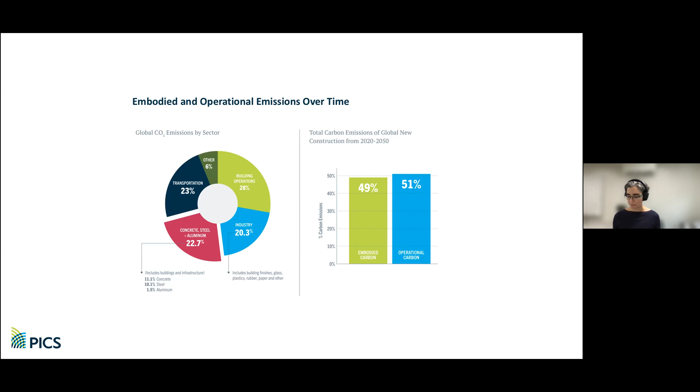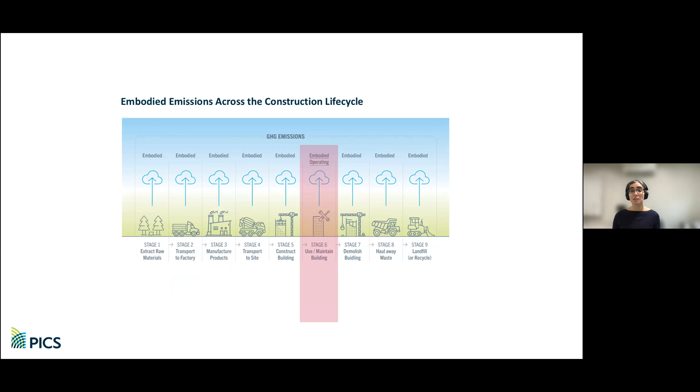To clarify the distinction between operational and embodied emissions, operational emissions only occur during building use, but embodied emissions occur across the entire construction life cycle. This is everything from material extraction to transportation, manufacturing, construction, and ultimately demolition and disposal.

A lot of committed practitioners and policymakers have recognized this issue and have been working hard on it. Influential organizations with a global reach have been developing policy frameworks to tackle it at scale. For example, the World Green Building Council shows that building nothing has the greatest carbon reduction potential. Similarly, the Carbon Neutral Cities Alliance offers an embodied carbon reduction pyramid.

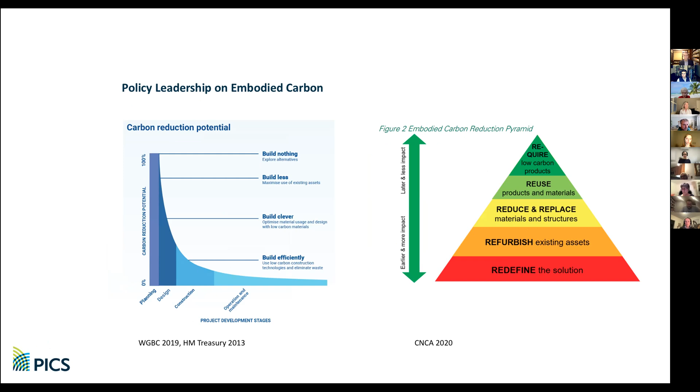At the base of the pyramid, the strategy that would have the most impact is redefining the solution. By this, they mean finding alternative ways to fill needs for space and construction, such as fully occupying existing buildings or building green rather than gray infrastructure.

Building on this, I developed a framework that emphasizes just how much work and the type of work that would have to be done to reduce embodied emissions. We have to acknowledge that reusing materials and reusing buildings would require a transformational shift. That is a shift at a social and cultural level. There is no simple technical fix.

In this framework, I categorize embodied carbon strategies in two major buckets: circular economy and material performance. Material performance includes the strategies that are most widely associated with embodied carbon reductions. This is using lower carbon materials and finding material efficiencies. Circular economy strategies, however, are more holistic. These include material reuse and building reuse.

In BC and elsewhere, material reuse is already gaining momentum with building deconstruction, material salvage, and reuse hubs. Building reuse may seem like the simplest on its surface, but is actually the toughest in practice, because ultimately this would mean fulfilling demand for new buildings with existing buildings instead.

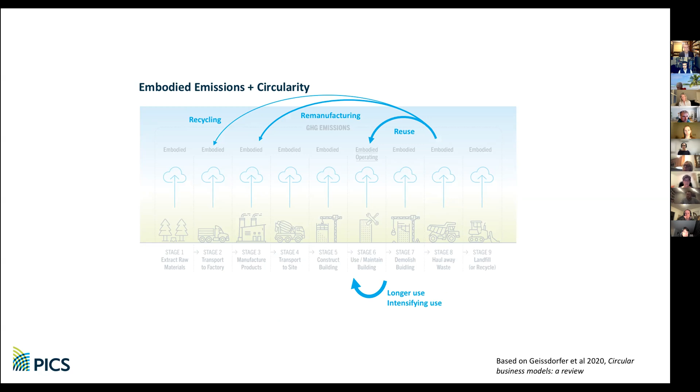So to briefly clarify the connection between embodied carbon and the circular economy, I've mapped circular economy principles onto the building life cycle stages. The circular economy means transforming from a linear take, make, waste model to a circular model that designs out waste through material reuse. Emphasizing highest and best use, you'd begin with increasing the use of buildings, then reusing materials, then remanufacturing, and finally recycling, which in practice is most typically downcycling or to an energy and a material input.

Through research and engagement with a wide range of built environment stakeholders, I found substantial overlap between these material performance and circular economy strategies and well-established work on urban sustainability in the domains of waste, equity, and preservation. In essence, this is a response that is all about reuse, not just reusing buildings, but using existing knowledge and policy pathways that have been around in some cases for decades. The circular economy is at the center because those strategies are poised to have the biggest impact.

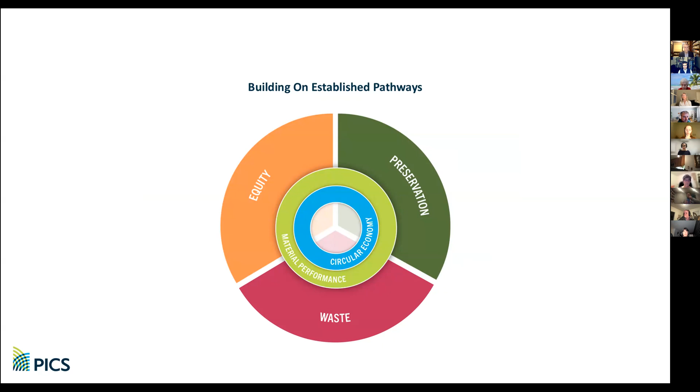In a minute, I'll go into some detail about the opportunities in these three areas. But first, I want to suggest the advantages of this approach. For one, getting traction on the issue, and two, reducing emissions. So to advance the agenda, there are a number of advantages of integrating embodied carbon into core urban sustainability work.

First, for many practitioners and policymakers, embodied carbon may appear to be a new frontier that requires a whole new technical apparatus. This can be daunting and may cause some to disengage for sheer lack of capacity. Making strong links to a larger urban agenda creates the opportunity to build a much larger constituency of support. You don't have to be a champion for embodied carbon per se, but may recognize it as a co-benefit, an additional advantage that merits doubling down on the work you're already doing.

Now, some people get really excited about embodied carbon, but they tend to be a small minority of engineers, designers, and builders. However, there are well-established interest groups that are dedicated to issues of waste, equity, and preservation. So this approach can make embodied carbon a mainstream concern.

Put simply, integrating embodied carbon is pragmatic. It reduces the startup effort required for introducing a whole new policy area and takes advantage of foundational nuts and bolts work in areas such as waste prevention. It's a shortcut to doing the work that needs to be done, rather than spending a lot of time measuring and accounting for emissions.

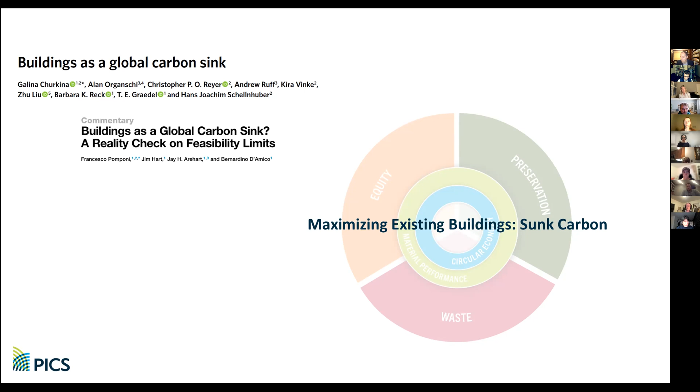If we zoom out to a big picture perspective where we're considering the time aspect of embodied carbon, it makes sense to not only think that current upfront emissions matter, but that historical emissions matter as well. So if you're making a decision to tear down and replace a building or reuse it, consider all of the carbon that was historically emitted to construct that building.

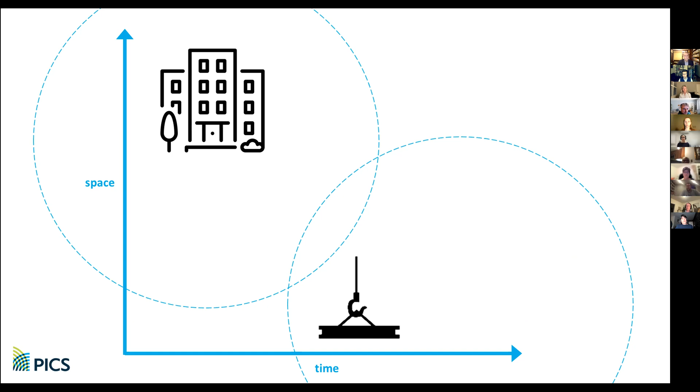To make this a little more concrete, it helps to look at a recent study in Finland that examined this time dimension. The researchers here conducted a study of a housing development with a 50-year time frame because that was the most relevant to current climate targets. They analyzed a proposed development of 220 detached and semi-detached houses, comparing a whole range of options for energy efficiency. Everything from base building code to moderate energy efficiency to passive house, which is a pretty extreme version of energy

efficiency. But they found that renovating 1960s buildings to a moderate energy efficiency standard resulted in lower emissions over the 50-year horizon than any other option. This takes into account that upfront carbon spike that necessarily occurs through any renovation or new construction project. This points to just how important it is to consider embodied and operational emissions together when making decisions about development options.

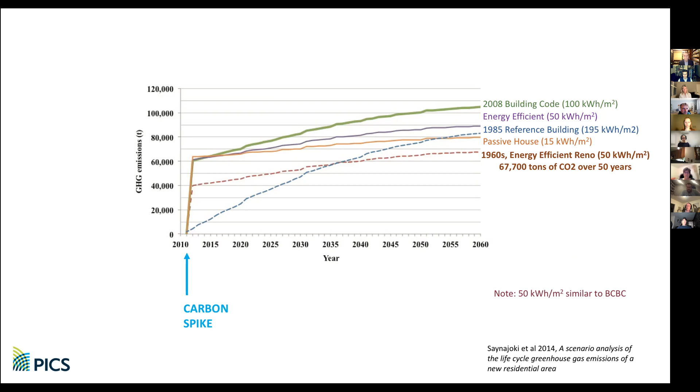The authors conclude that new construction cannot be used as a means to achieve short and middle term climate goals, and others have come to similar conclusions. Researchers studying the carbon performance of an urban precinct in Australia found that growth in floor area had a much higher impact on emissions than growth in population. Therefore, it is essential to develop with less floor area per capita.

So now let's get into some details of the three main strategies. Beginning with equity, retrofitting affordable housing presents a large opportunity. Across Canada and across North America, a large part of the affordable housing stock is in the form of older apartment buildings, which are often not performing well in terms of energy or occupant comfort.

The Tower Renewal Partnership, an organization based in Toronto, is dedicated to upgrading affordable rental housing. Their work was not driven by the embodied carbon benefit, but they were interested enough to do a back of the envelope calculation, which showed that for an 18-story tower from the 1960s that they renovated, if they had instead replaced it with a new building, it would take 180 years to offset that carbon.

Another way that cities can center equity is they can build on the workforce development that's already happening for deconstruction, with needs across the value chain from deconstruction, salvage, warehousing, and resale, and programs in several cities around the US and in Canada that prioritize marginalized populations in obtaining these jobs.

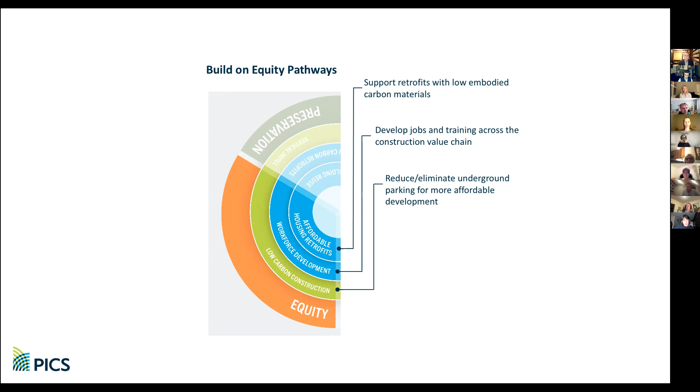So I suggest that materially efficient construction is a second choice, but obviously there's still going to be a lot of new construction. So it's interesting to look at this study, which demonstrates the relative impact of concrete. The architect Kelly Alvarez Doran worked with his studio at the University of Toronto to analyze the embodied carbon in underground parking in a sample of buildings across the city. They found that for mid-rise buildings, the impact could be huge, with anywhere from 66 to 90% of the embodied carbon coming from underground parking.

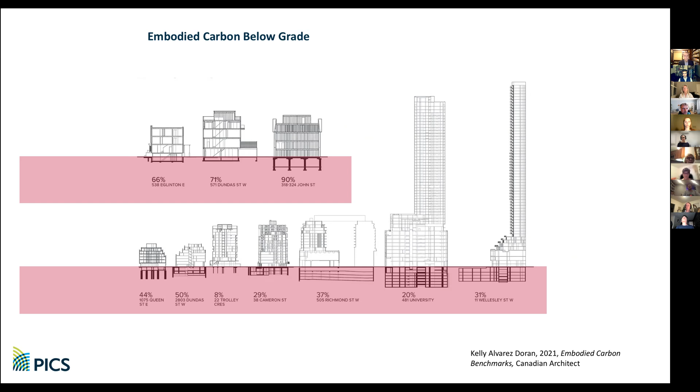As you may know, underground parking is also incredibly expensive, up to $40,000 US per space. So reducing or eliminating it can mean cost savings that can be passed on to renters or buyers. Of course, this also requires support from transportation planning. You need the active and public transportation to enable a shift away from cars and make it realistic to reduce underground parking.

Moving on to preservation. The word connotes historic preservation, but I mean it in the broadest sense possible, including retrofit and adaptive reuse. One of the biggest things that cities can do is support building reuse through codes and incentivize it, potentially levying a tax or fee on new development to help support building reuse.

Even retrofits can entail a large amount of embodied carbon, so it's important to evaluate the impact of the building materials being used. The Reframed initiative in BC, which is a partnership between the federal government, provincial government, and multiple housing organizations, is working on deep retrofits of affordable housing. And they'll be analyzing the embodied carbon of retrofit materials. So those will be useful results to watch out for this year.

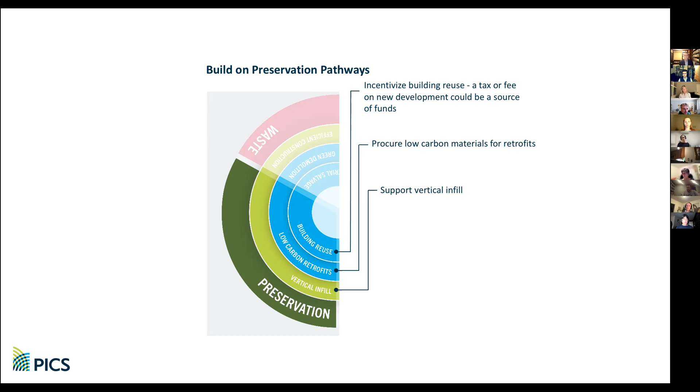Finally, in dense urban environments, vertical infill or building additional stories on top of existing buildings is common. But there's still more opportunity to do this, making the most of existing structural capacity where structures have been overbuilt. There could be a synergy with mass timber here because it's a lighter material and lower carbon, so it can be a good candidate for vertical infill.

There's an emerging business case for extending the life of buildings. Arup, the engineering firm, and the Ellen MacArthur Foundation have done preliminary work based on case studies in Europe, where preserving buildings is more standard practice than in North America. The study pinpointed several major sources of lost value and strategies for recapturing that value.

In response to premature demolition, they proposed making assets more adaptable through both retrofits and alternative investment models. In response to underutilized space, they proposed flexible leasing arrangements to achieve a fully occupied building. In response to underperforming components, they propose a product as a service model. This can extend to lighting, carpets, even the building envelope, where a service provider has a contract with a building owner to repair or replace components. With responsibility over the lifespan, this can incentivize more durable, better performing components.

These efforts may reside more in the private sector than the public sector, but the public sector can lead by example with these kinds of leasing and service models, and they can also form part of the enabling ecosystem, working with industry associations and real estate firms to shift the business model.

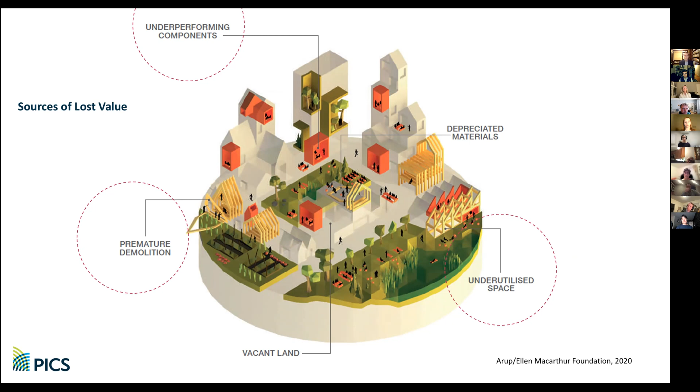Finally, waste is a major existing opportunity. It might seem that requiring deconstruction would have the biggest impact. But based on contractor experience so far, material disposal bans actually have the bigger upfront impact, at least in reducing the construction materials going to the landfill. Actually reusing those materials is another matter. Waste diversion is commonly tracked, but material reuse is not. And this is an area that requires a lot of work. Not just on tracking, but on the infrastructure to support material reuse, which means the warehouses and the systems to resell those materials.

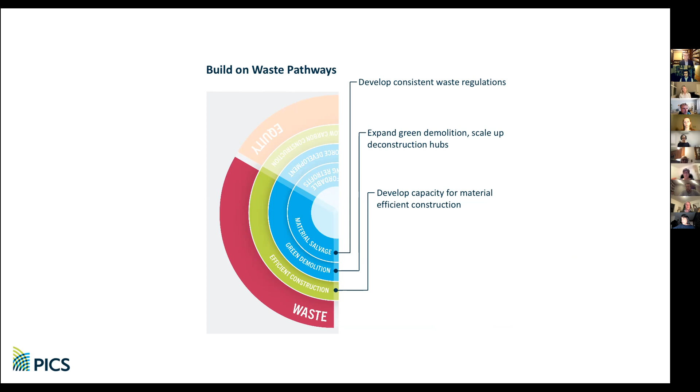Finally, when it comes to new construction, there are multiple stages where material efficiency can be incorporated, including design and construction waste management. So that gives you a sense of some of the opportunities to take advantage of existing work in waste, equity, and preservation to achieve linked embodied carbon and circular economy goals. But there's also a lot of room for research and development.

I've been pushing forward several projects based on this work, based on questions that I've been receiving from stakeholders in the industry. So first, building on that work with the commercial real estate sector that Arup did, I've been working with Circular Economy Leadership Canada and industry associations to scope out a project to work with large asset managers on how they can viably extend the life of the buildings that they manage.

Second, PICS had funded a project with the City of Victoria for them to look at their operational emissions, but we saw an opportunity and interest here to add on an embodied carbon piece. So questions were coming up about the embodied carbon ramifications of tearing down a single family home or two single family homes and replacing them with multi-unit buildings. And so we'll be looking at that so that the city can make a better calculation about what those tipping points are around densification.

Finally, this work that I've done lays out a way of thinking about embodied carbon policy, but of course, cities want to get into the nuts and bolts. And so I'm currently working with some smaller communities in BC that don't have the capacity of a city like Vancouver or Boston to develop their own regulations, to figure out what it would really mean for them to build on waste, equity and preservation, to develop replicable policies that cities across BC and even North America could potentially adopt. So all along, this has been a really iterative process. So I'm really interested in your feedback and where you think this initiative could go from here. Thank you.